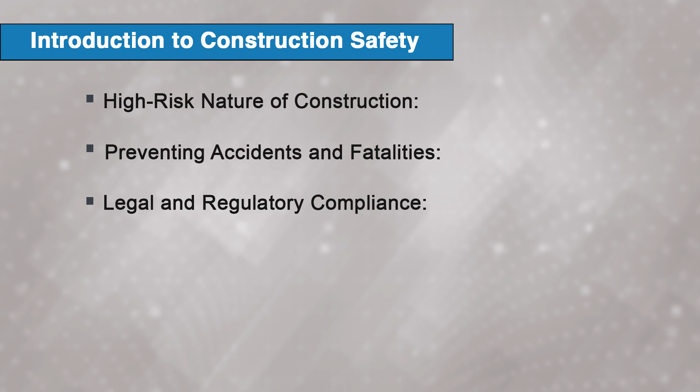The importance of safety is also required for legal and regulatory compliance. Adherence to safety regulations such as those established by the Occupational Safety and Health Administration (OSHA) is mandatory and helps avoid legal penalties, fines and potential shutdowns. Compliance demonstrates a company's commitment to worker welfare and can enhance its reputation within the industry.

Safety is also required for the economic benefits. Reducing workplace accidents leads to lower medical and insurance costs and minimizes downtime caused by incident investigations and repairs. A safe working environment improves efficiency and productivity, contributing to timely project completion and cost savings.

It is also required for the moral and ethical responsibility. Employers have an ethical obligation to provide a safe and healthy workplace, ensuring that employees return home safely each day. Prioritizing safety fosters a culture of care and respect, which can improve employees' morale and job satisfaction.

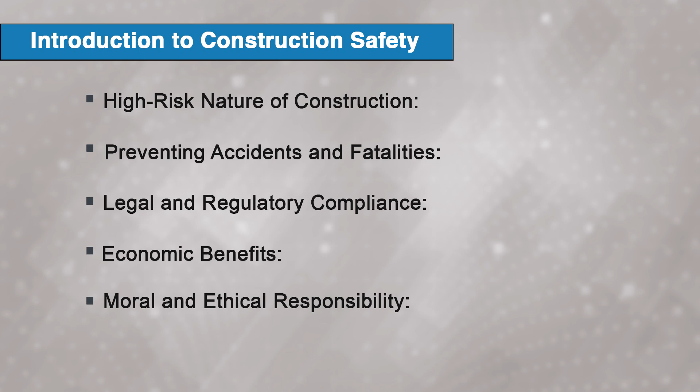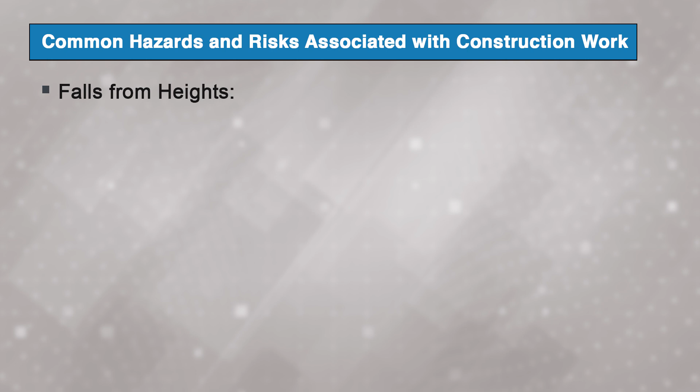Moving on, let us discuss some of the common hazards and risks associated with construction work. First one is falls from height. It is one of the leading causes of fatalities in construction, often occurring due to inadequate fall protection and unguarded edges or improper use of scaffolding and ladders. Mitigation includes strategies like using guardrails and safety harnesses, and ensuring proper training in working at heights.

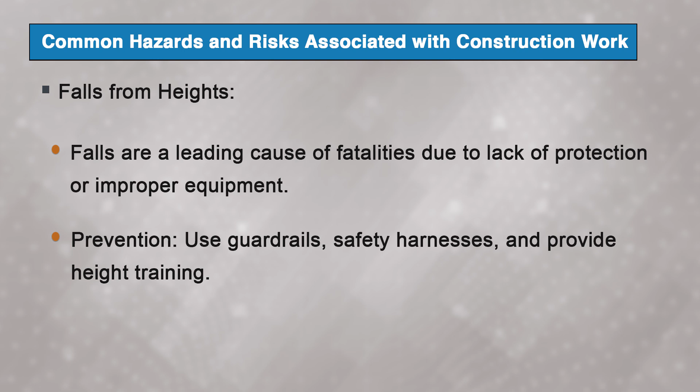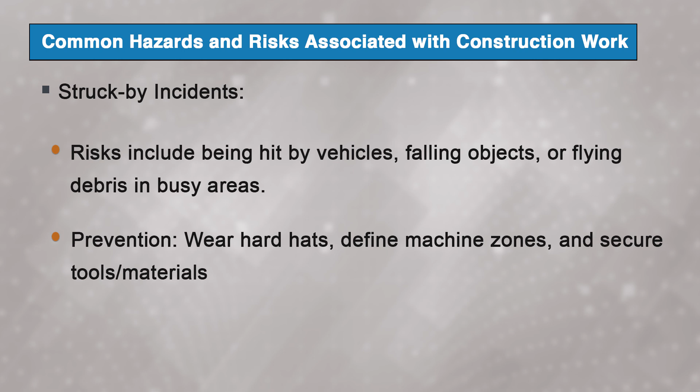Next one is struck-by incidents. Workers are at risk of being hit by moving vehicles, falling objects or flying debris, especially in busy or cluttered work areas. Safety measures involve enforcing the use of hard hats, establishing clear zones for machinery operation and securing tools and materials properly.

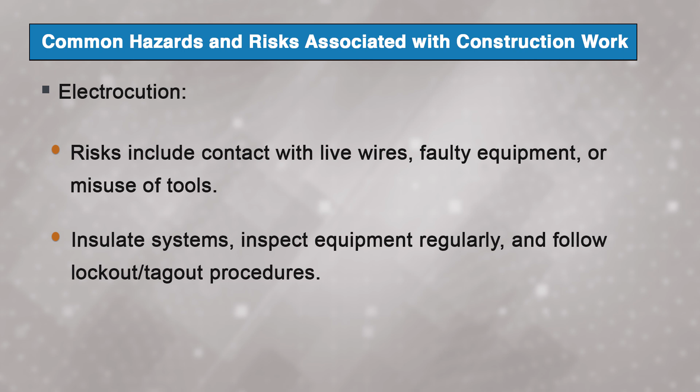Next one is electrocution. Risks arise from contact with live wires, faulty electrical equipment or improper use of electrical tools. Preventive actions can include proper insulation of electrical systems, regular equipment inspections and adherence to lockout/tagout procedures.

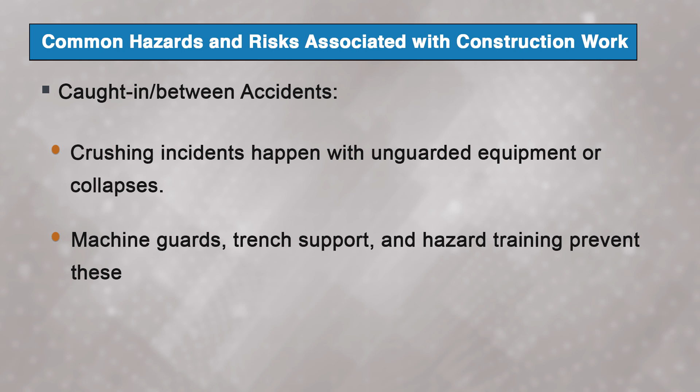Next one is caught-in or between accidents. These occur when workers are caught in or compressed by equipment or objects or when structures collapse. Safety protocols involve ensuring machinery is properly guarded, trenches are adequately supported and workers are trained to recognize and avoid such hazards.

Next hazard is exposure to hazardous material. Construction work can involve handling chemicals, asbestos, silica dust, and other harmful substances leading to respiratory issues and other health problems. Protective measures include using appropriate PPE, that is personal protective equipment, ensuring proper ventilation and providing training on handling and disposing of hazardous materials safely.

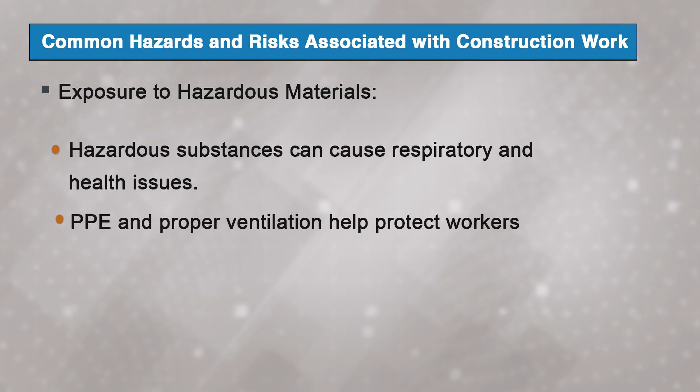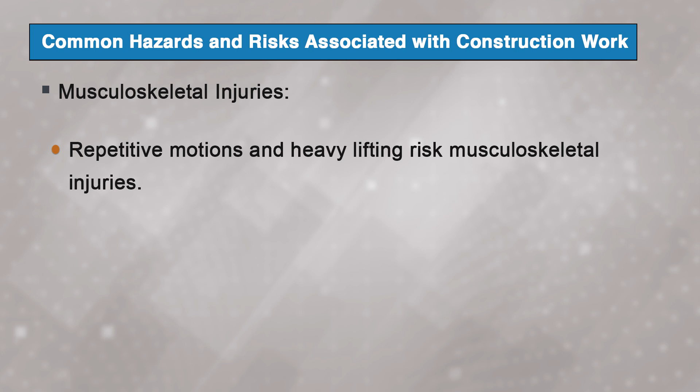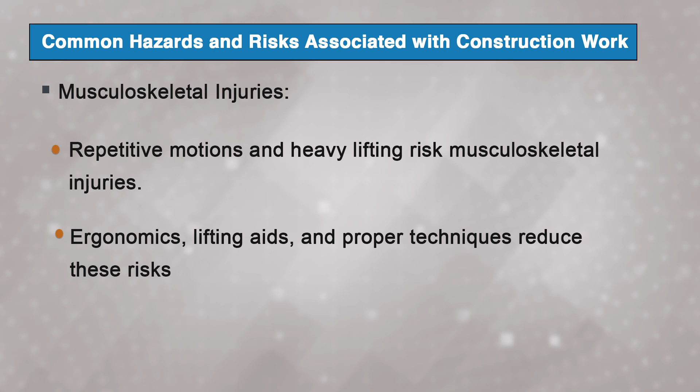Next one is musculoskeletal injuries. Repetitive motions, heavy lifting and awkward posture can cause strains, sprains and long-term musculoskeletal disorders. Implementing ergonomic practices, using mechanical lifting aids and training workers on proper lifting techniques can reduce these risks.

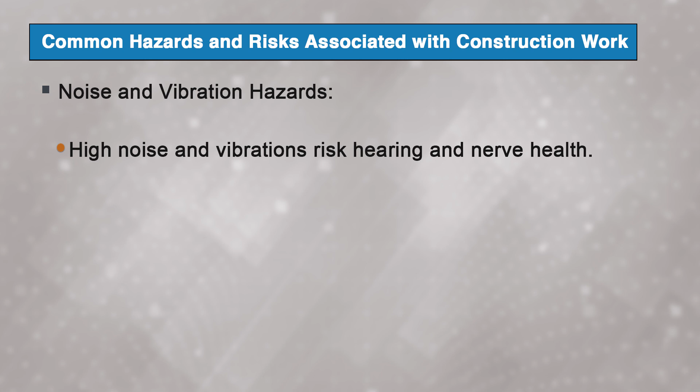Next hazard is noise and vibration. Prolonged exposure to high noise levels can cause hearing loss, while excessive vibration can lead to circulatory and nerve disorders. Use of ear protection, regular equipment maintenance and monitoring exposure levels are essential to minimize these hazards.

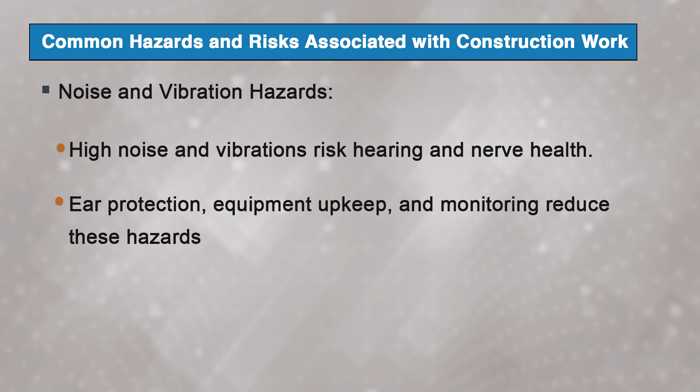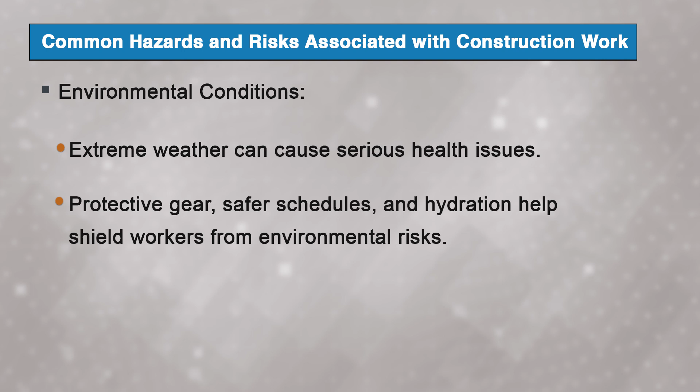Next is environmental conditions. Extreme temperatures, inclement weather and exposure to sun can result in heat stroke, hypothermia and other weather-related health issues. Providing appropriate clothing, scheduling work during safer times of the day and ensuring access to hydration and shelter help protect workers from environmental hazards.

Moving on, we will be discussing the role of safety in protecting workers and maintaining productivity. A strong safety culture ensures that workers feel valued and protected, leading to increased job satisfaction and loyalty. Healthy and safe workers are more likely to perform efficiently and effectively, contributing positively to project outcomes. It will reduce downtime and delays.

Accidents can halt construction activities, leading to project delays and increased cost due to the medical expenses and equipment repairs. Effective safety practices minimize interruption by preventing incidents that cause work stoppages.

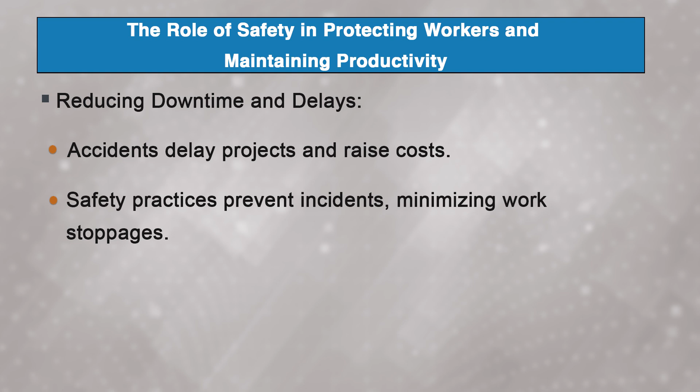Next is improving quality of work. Safety protocols often go hand in hand with quality control measures, ensuring that work is performed correctly and safely. Workers who are not worried about their safety can focus better on their task, resulting in higher quality workmanship.

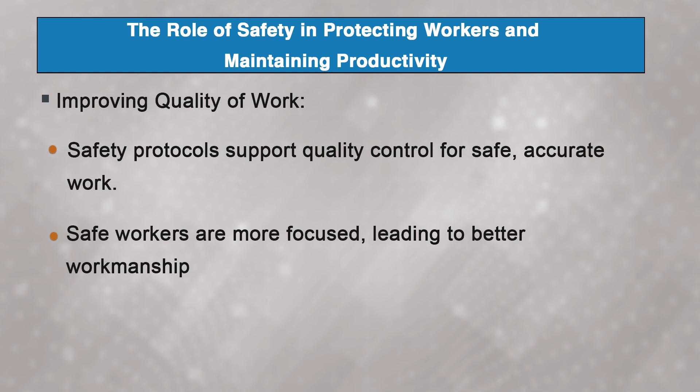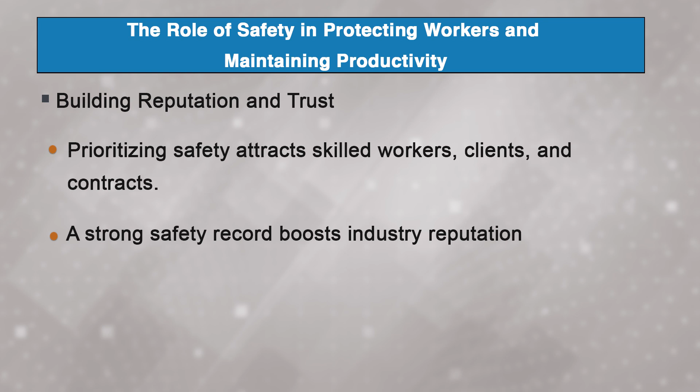Building reputation and trust. Companies known for prioritizing safety are more likely to attract skilled workers, win contracts and earn the trust of clients and stakeholders. A good safety record demonstrates professionalism and responsibility, enhancing a company's standing in the industry.

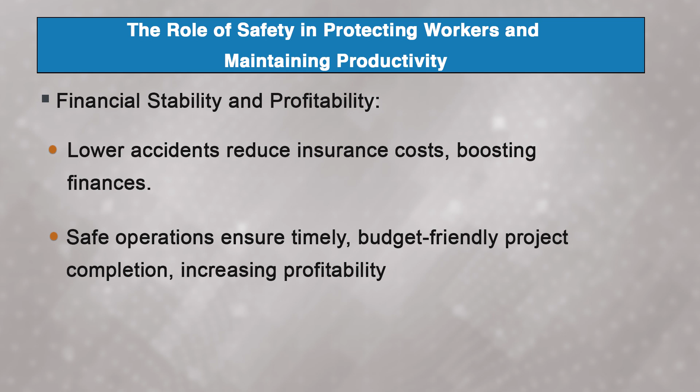Next one is financial stability and profitability. Lower accident rates reduce insurance premiums and workers' compensation claims, contributing to better financial performance. Efficient and safe operations can lead to successful project completion within budget and time frame, improving profitability and competitiveness.

Moving on, we will be discussing personal protective equipment, that is PPE, in construction. So, what is PPE? It basically refers to specialized clothing or equipment worn by workers to protect against health and safety hazards. It includes items like helmets, gloves, eye protection, high visibility clothing, safety footwear and harness, etc.

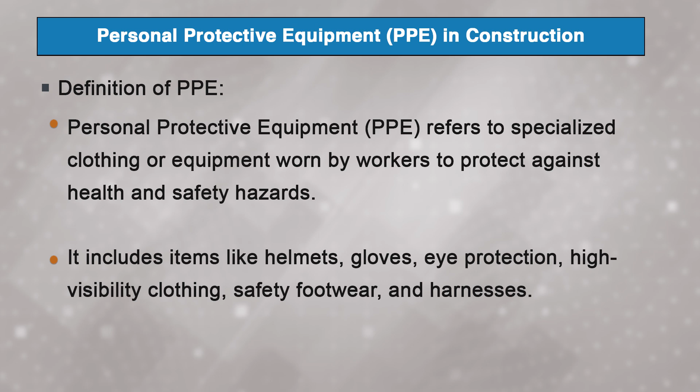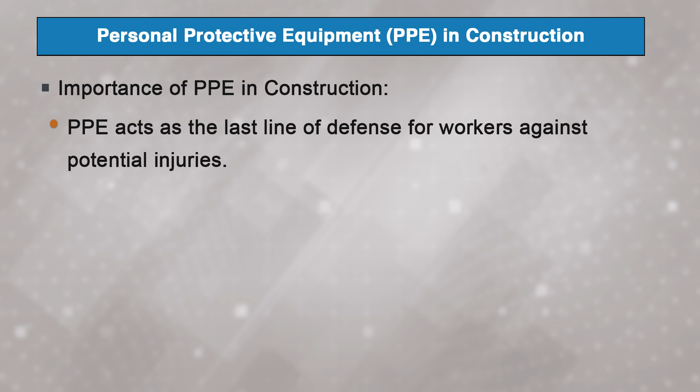So, one question comes to mind: what is the importance of PPE in construction? PPE acts as a last line of defense for the workers against potential injuries from various hazards present on construction sites. It significantly reduces the risk of injuries and fatalities by providing physical protection against specific dangers like falling objects, sharp materials and hazardous substances.

PPE is essential not just for worker safety, but also for regulatory compliance, as failure to use appropriate PPE can lead to legal consequences and fines. Moving on, we will discuss some of the types of PPE and their specific uses.

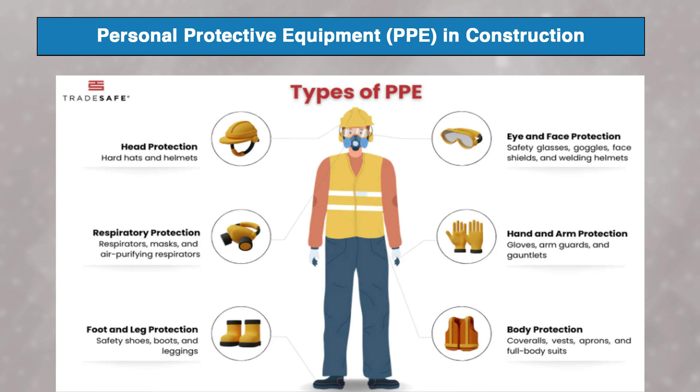First one is head protection. Hard hats protect the head from falling objects, debris and electrical hazards. There are different classes of hard hats. For example, class G for general use, class E for electrical work, class C for comfort and impact protection.

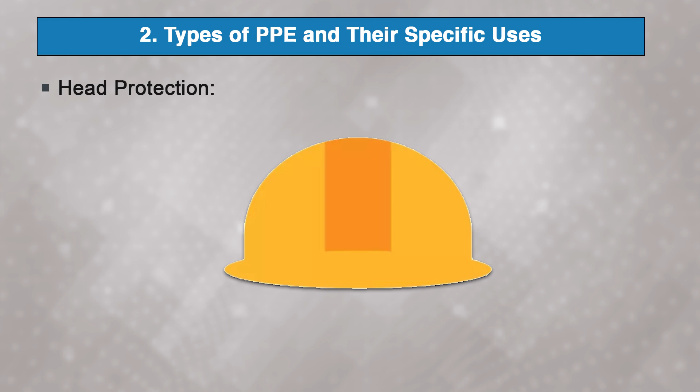Next one is eye and face protection, in which we include safety glasses, which shield the eyes from dust, flying particles and chemical splashes. Next in this category is goggles, which provide a secure fit around the eyes, offering more comprehensive protection against hazards like chemicals, dust and welding sparks.

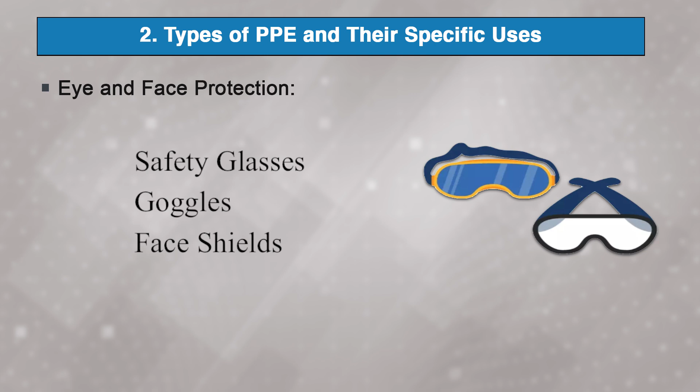Next one is face shield. It is used for tasks like grinding, cutting or handling hazardous chemicals where full face protection is necessary. Next PPE is hearing protection, which includes earplugs. They are inserted into the ear canal to protect against high noise levels, particularly in areas with heavy machinery.

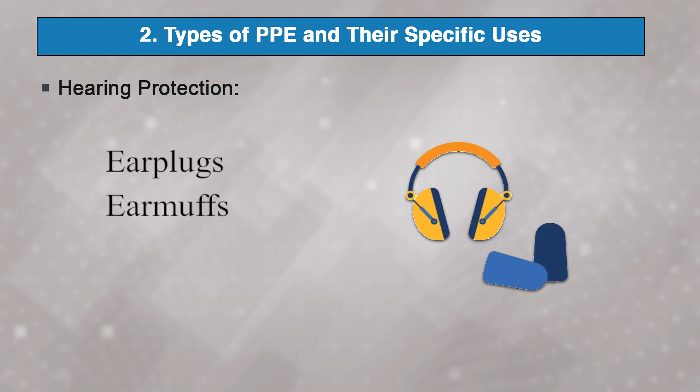Next in this category is earmuffs, which cover the entire ear, offering a higher level of protection against loud noises and can be used in conjunction with other PPE. Next PPE is for respiratory protection, which includes the dust mask. It is used for environments with non-toxic dust, such as during sanding or sweeping.

In this category, respirators are also used, which provide protection against harmful dust, fumes and gases. Types include half face or full face respirators depending on the level of protection needed. Powered air purifying respirators are also used. These are used in environments with high levels of contaminants, providing filtered air to the user.

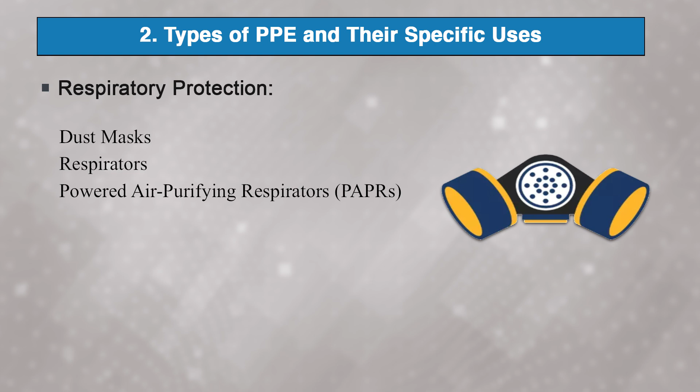Next PPE is for hand protection. In this category, gloves protect hands from cuts, abrasions, chemical exposure and electrical hazards. Different gloves are designed for specific tasks, such as cut resistant gloves for handling sharp materials, chemical resistant gloves for working with hazardous substances and insulated gloves for electrical work.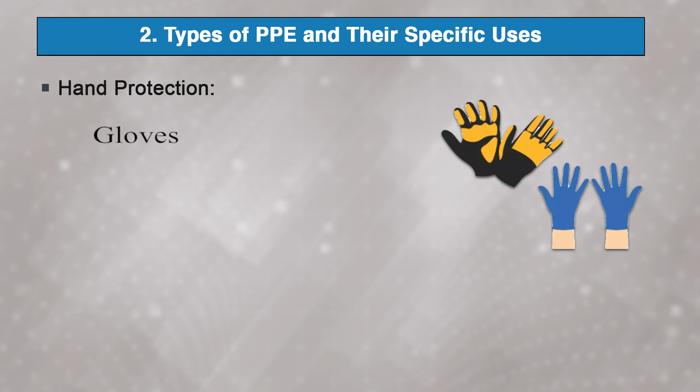Next PPE is for foot protection, which includes safety boots, which provide protection against foot injuries caused by heavy objects, sharp debris and slippery surfaces. Steel or composite toe caps, puncture resistant soles and slip resistant treads are common features of safety boots.

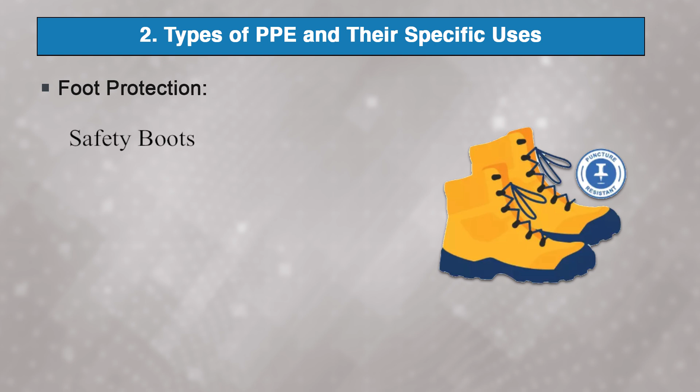Next PPE is for body protection, which includes high visibility clothing. It is essential for workers operating near moving vehicles or machinery, especially in low light conditions. Next in this category is coveralls, which protect the body from exposure to harmful substances, dirt and abrasions.

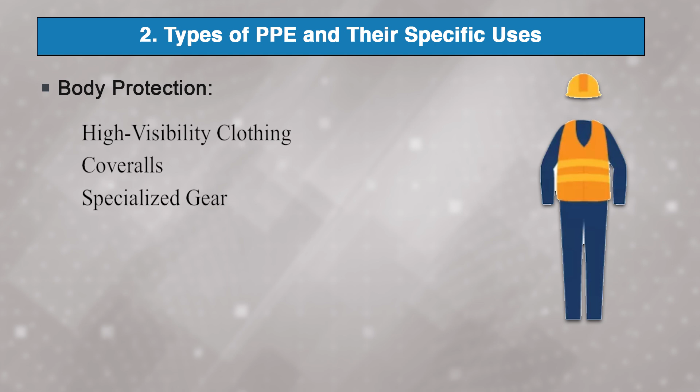Also in this category is specialized gear, basically flame resistant clothing for workers exposed to fire hazards and chemical resistant suits for those handling hazardous materials. Next PPE is for fall protection, which includes the safety harness. It is used when working at heights to prevent falls. They must be properly fitted and connected to a secure anchor point.

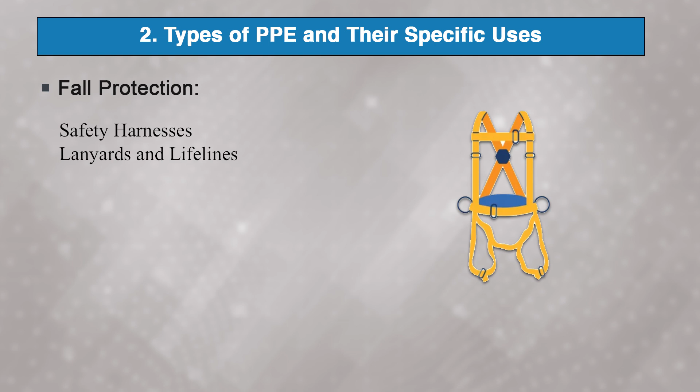Lanyards and lifelines provide additional fall protection, absorbing shock and preventing falls from leading to serious injuries.

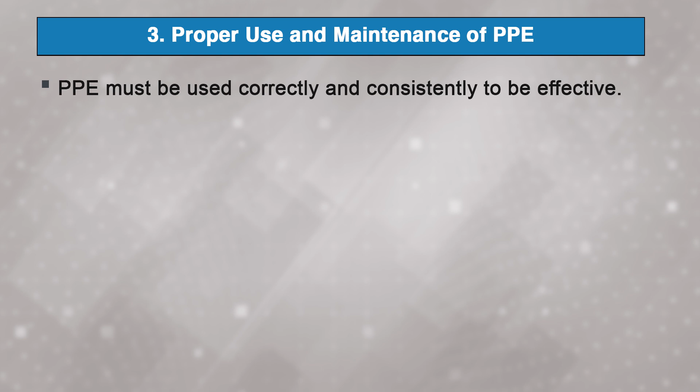Now, how to use or properly use and maintain PPE. Correct usage means PPE must be used correctly and consistently to be effective. Workers should be trained on how to properly wear and use each type of PPE. Misuse or improper fit can reduce the effectiveness of PPE, leading to increased risk of injury.

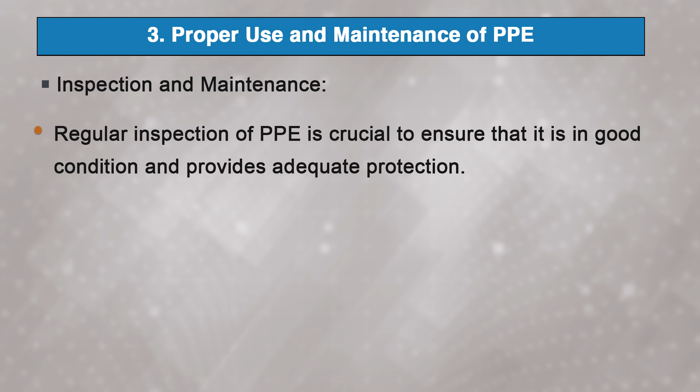Next is inspection and maintenance of PPE. Regular inspection of PPE is crucial to ensure it is in good condition and provides adequate protection. Damaged or worn out PPE should be replaced immediately to maintain safety standards. Workers should be trained to identify signs of wear and tear, such as cracks in hard hats, scratches on safety glasses, or fraying in harnesses.

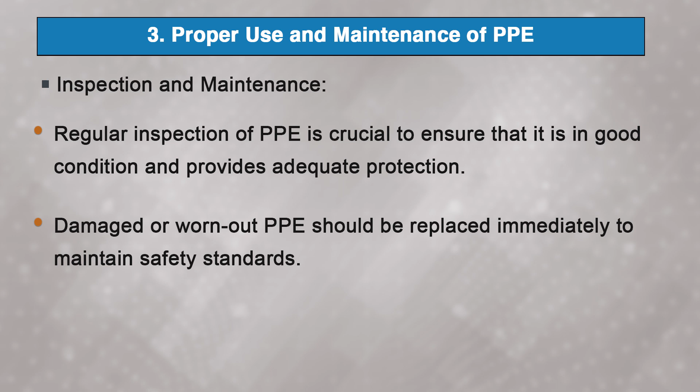Next is hygiene and storage. PPE should be kept clean and stored in a dry, safe place when not in use to prolong its life and effectiveness. Respiratory protection devices in particular require regular cleaning and proper storage to prevent contamination and ensure their protective qualities.

Next topic is regulatory requirements for PPE. There are legal standards and guidelines, including OSHA and other regulatory bodies, which have established specific standards for the use of PPE in construction. Employers are legally required to provide PPE to workers at no cost and ensure it meets safety standards.

There are employer responsibilities too, including that employers must assess the workplace for hazards and determine the necessary PPE for each task. They are also responsible for providing training on proper use, care, and maintenance of PPE.

There are worker responsibilities also, including that workers are required to use the PPE provided and follow the training they receive on its correct use. They must report any issue with PPE to their supervisor and refrain from using damaged or ineffective equipment.

Moving on, we will discuss our next topic: hazard identification and risk assessment. Hazard identification involves recognizing and assessing potential sources of harm or danger in the workplace. It is the first step in the process of risk management, encompassing all activities, conditions, or materials that have the potential to cause injury, illness, or damage.

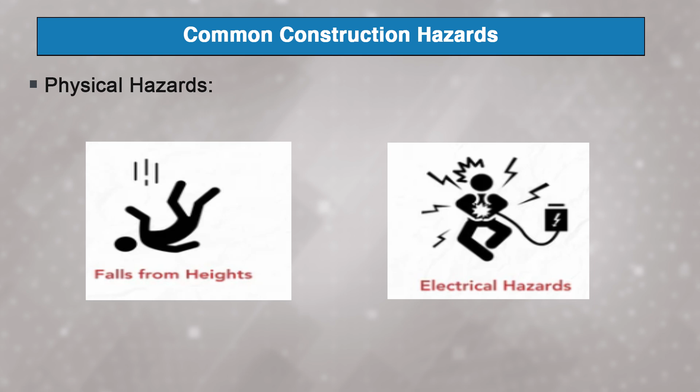Next in physical hazards is struck-by hazards: workers being hit by moving vehicles, falling objects, or flying debris. This is common in areas with heavy machinery or overhead work. Next is caught-in or caught-between hazards, as we have already discussed: workers being caught in or compressed by equipment, collapsing trenches, or materials. This includes risk from machinery, unsecured trenches, and collapsing structures.

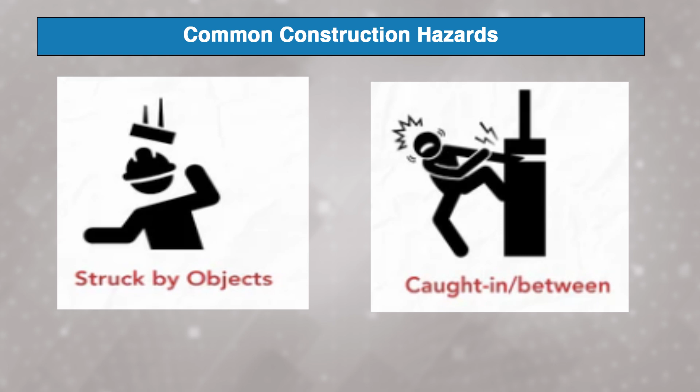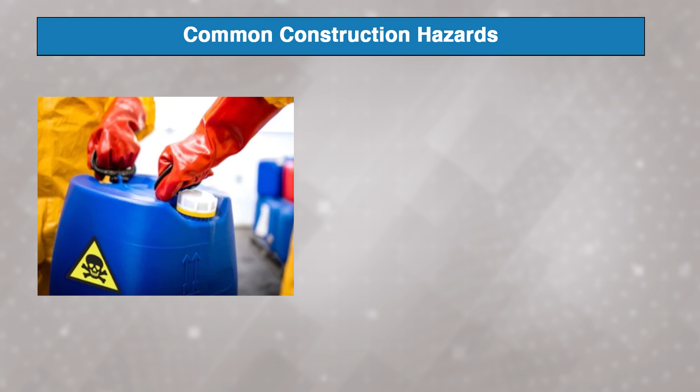Next type of hazard is chemical hazard: exposure to hazardous substances, for example inhalation or contact with chemicals like asbestos, silica, lead, or toxic fumes, can cause respiratory issues, skin irritation, and long-term health problems. Fires and explosions from flammable materials, gases, and improper handling of chemicals can result in fires or explosions causing severe injuries or fatalities.

Next hazard is ergonomic hazard, which includes manual handling: improper lifting techniques, repetitive motion, and awkward posture can lead to musculoskeletal injuries. Next in this is vibration and noise: prolonged exposure to high levels of vibration and noise can cause long-term damage to nerves, muscles, and hearing.

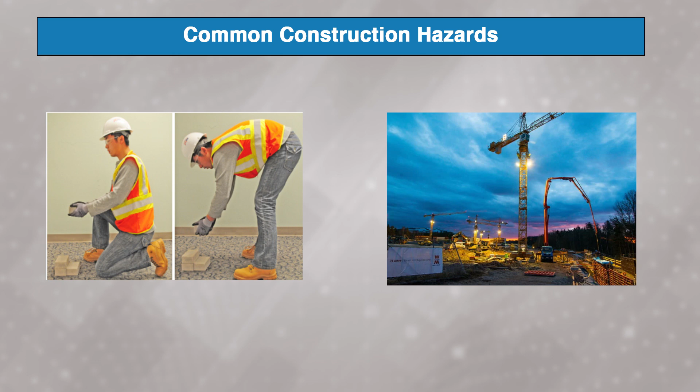Next hazard is environmental hazard, in which first is extreme weather conditions: working in harsh weather such as extreme heat, cold, or storms can lead to heat stroke, hypothermia, or accidents due to slippery surfaces. Poor or insufficient lighting increases the risk of accidents, especially in areas where precision work is required or hazards are not easily visible.

Now, what are the techniques for hazard identification? First is site inspection: regular and systematic inspection of the work site to identify potential hazards. Inspections should be carried out by trained personnel who can recognize both existing and potential dangers. Tools like checklists can ensure that no potential hazard is overlooked during inspection.

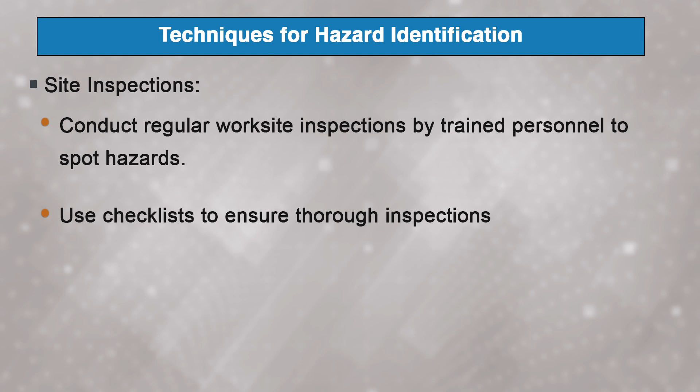Next technique is job safety analysis, a process of breaking down a job into individual steps, identifying the hazards associated with each step and determining the necessary controls to mitigate those hazards. Job safety analysis helps workers understand the specific risks of the task and how to avoid them.

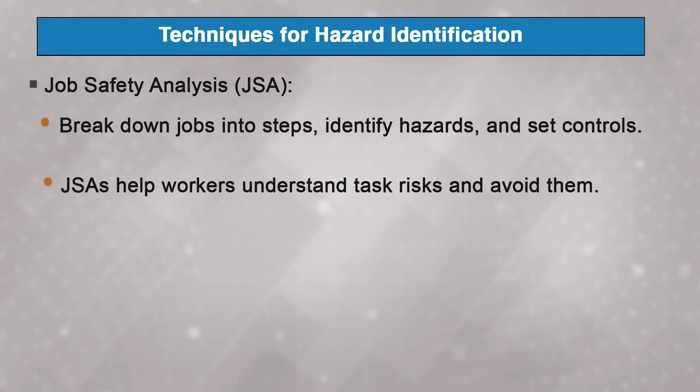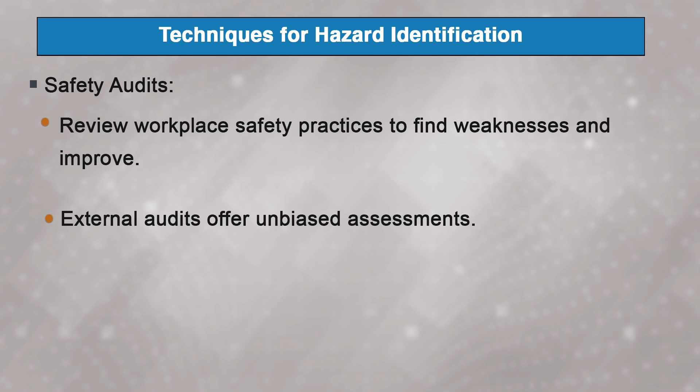Next we can do are the safety audits, a comprehensive review of the workplace safety practices, policies and procedures. Audits help identify weaknesses in the safety protocols and provide recommendations for improvement. External audits by independent bodies can provide an unbiased assessment of safety practices.

We can also take workers' feedback, which includes encouraging the workers to report hazards they observe. Workers are often the first to notice potential dangers, and their input is valuable in identifying hazards that might be missed during formal inspection. Anonymous reporting systems can help ensure that workers feel comfortable reporting hazards without fear of retaliation.

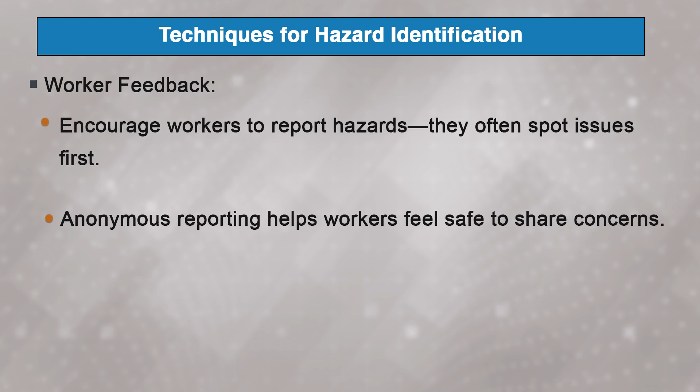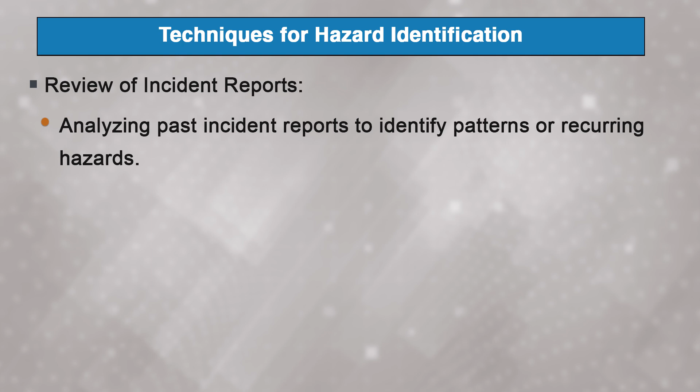Next technique is review of incident reports, analyzing past incident reports to identify patterns or recurring hazards. Understanding the causes of previous accidents can help prevent similar incidents in the future. Near miss reports are also valuable as they indicate hazards that could have led to an accident if not addressed.

Next one is the risk assessment process, which includes firstly identifying hazards, systematically identifying all potential hazards in the workplace through inspection, observation and employee feedback, consideration of both routine and non-routine activities as well as potential emergencies.

Next is assessing risk, evaluating the likelihood of each identified hazard causing harm and the severity of the potential consequences, using tools like risk matrices to categorize risk as low, medium or high based on their probability and impact.

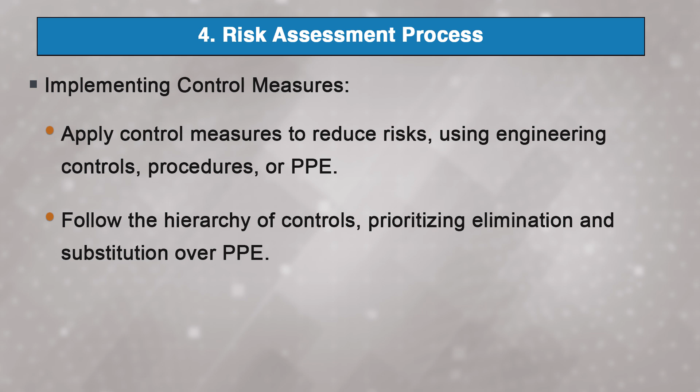Next, implementing control measures, determining appropriate control measures to eliminate or mitigate risk. Controls can be engineering controls, for example barriers, ventilation, administrative controls, for example training procedures, or personal protective equipment, that is PPE. The hierarchy of control should be followed, prioritizing elimination and substitution of hazards over reliance on PPE.

Next one is monitoring and reviewing. Regularly monitoring the effectiveness of implemented controls to ensure they are working as intended. Reviewing risk assessments periodically and after any changes in work processes, new equipment or incidents to ensure ongoing safety.

So, our next topic is about safety measures for working at height. Working at height is one of the most dangerous activities in construction, with falls being a leading cause of fatalities. This focuses on essential safety measures to prevent falls and ensure worker safety.

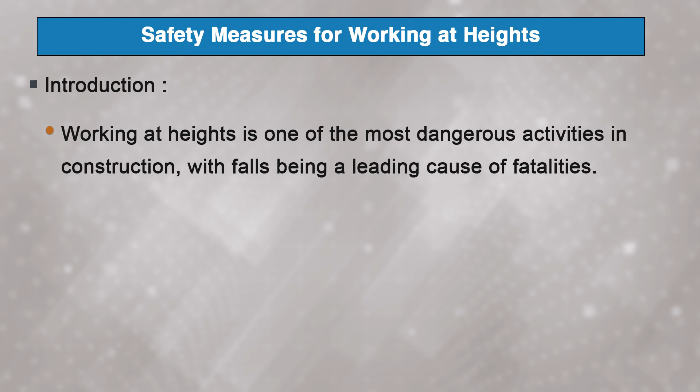First method of fall protection will be the guardrails. Guardrails are physical barriers installed around open edges such as roofs, scaffolds and elevated work platforms to prevent workers from falling. They are the preferred method of fall protection as they provide a passive form of safety that does not require workers to take specific actions to be protected.

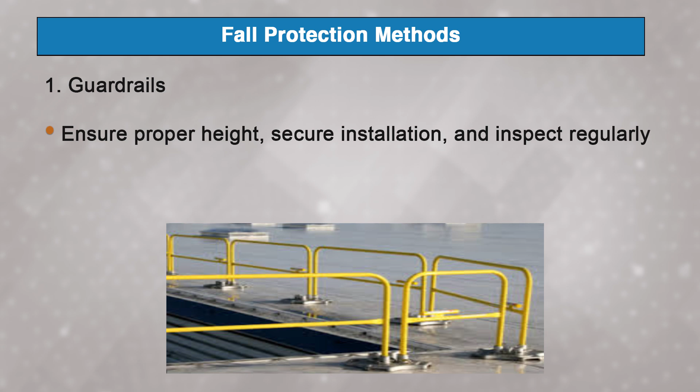Now, we will discuss design and installation of guardrails. Guardrails must be constructed to withstand the force of a person falling against them. Typically, they consist of a top rail, mid rail and a toe board. Proper installation is critical. The top rail should be at a height that prevents workers from accidentally stepping over or leaning beyond the edge. Regular inspections are necessary to ensure guardrails remain secure and undamaged.

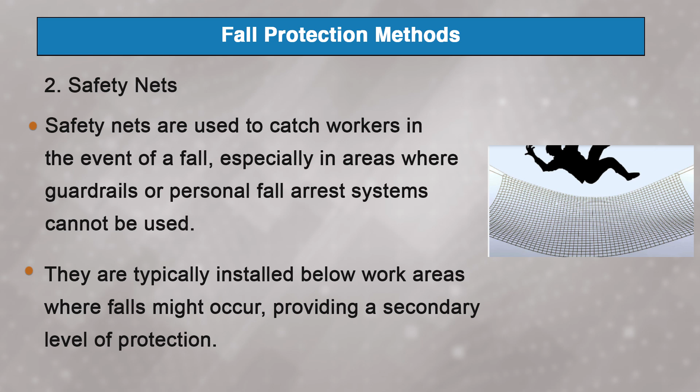Next one are the safety nets. Safety nets are used to catch workers in the event of a fall, especially in areas where guardrails or personal fall arrest systems cannot be used. They are typically installed below work areas where falls might occur, providing a secondary level of protection. Safety nets should be positioned close enough to the work surface to limit the distance of a fall. They must be securely anchored and regularly inspected for damage or sagging to ensure they function correctly.

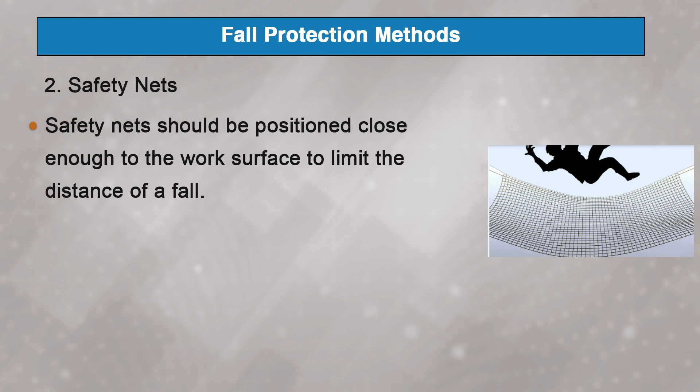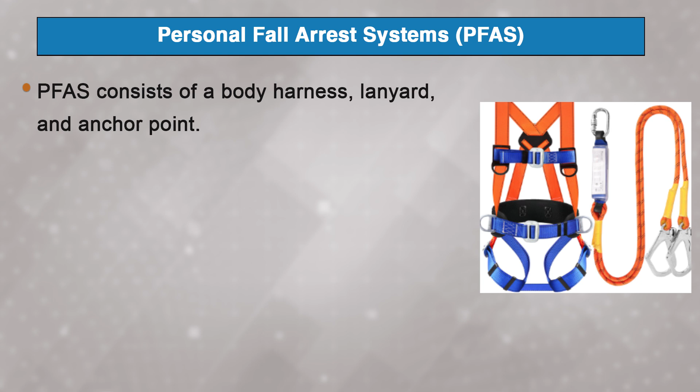Next one is the Personal Fall Arrest System, PFAS. PFAS consists of a body harness, lanyard and anchor point. This system is designed to safely stop a fall and minimize injury by distributing the force of the fall across the body. The body harness must fit the worker properly and be worn at all times when there is a risk of falling. The lanyard connects the harness to an anchor point, often equipped with a shock absorber to reduce the impact of a fall. The anchor point must be capable of supporting the force of a fall, typically rated to hold at least 5,000 pounds per worker attached.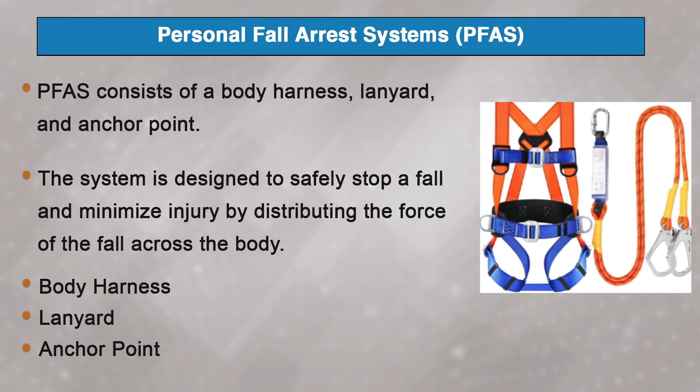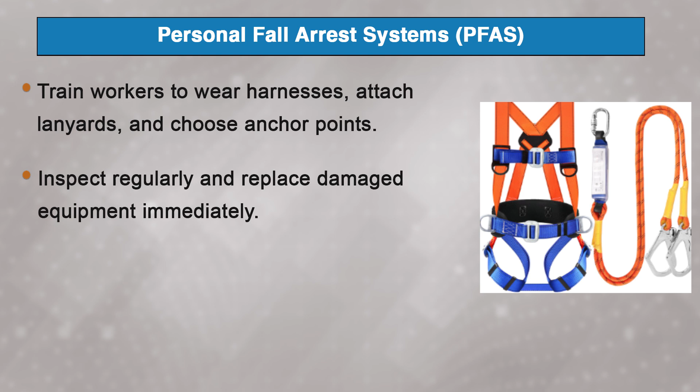Next is proper use and maintenance. Workers must be trained on how to correctly wear the harness, attach the lanyard and choose an appropriate anchor point. Regular inspections are crucial to identify wear and tear or damage to the equipment. Any compromised component must be replaced immediately.

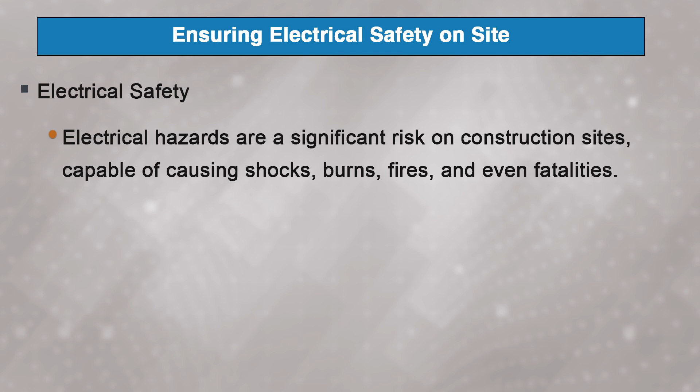Next topic will be dealing with electrical safety on site. Electrical hazards are a significant risk on construction sites, capable of causing shocks, burns, fires and even fatalities. Electrical safety procedures: first one is the lockout or tagout, that is LOTO procedure.

LOTO procedures are used to ensure that machinery and electrical systems are completely de-energized before any maintenance or repair work begins. The procedure involves locking the power source in an off position and tagging it to indicate that it should not be operated until the lock and tag are removed by the person who applied them.

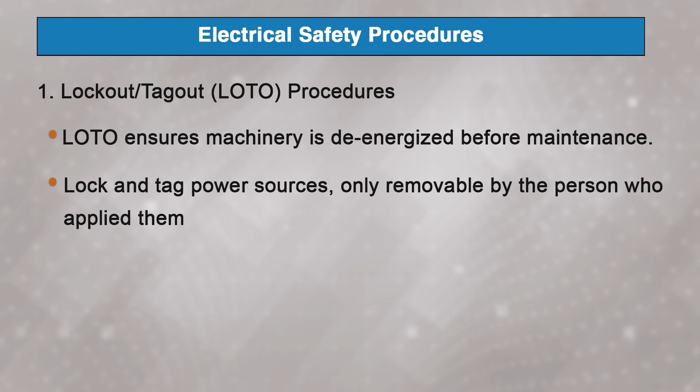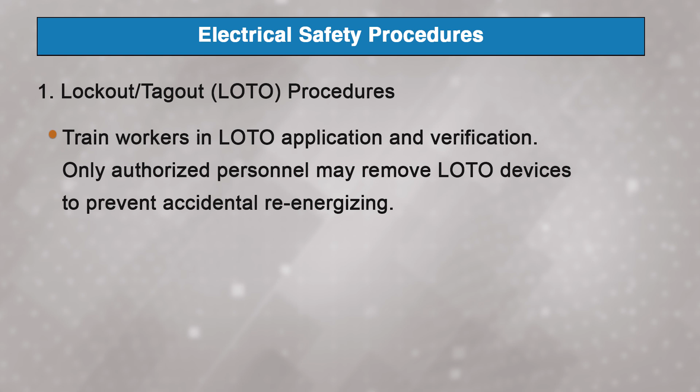Workers must be trained in the correct application of LOTO procedures, including how to lock and tag power sources and how to verify that the equipment is de-energized. Only authorized personnel should be allowed to remove LOTO devices, ensuring that no one inadvertently re-energizes the equipment while work is still in progress. Next method is proper insulation.

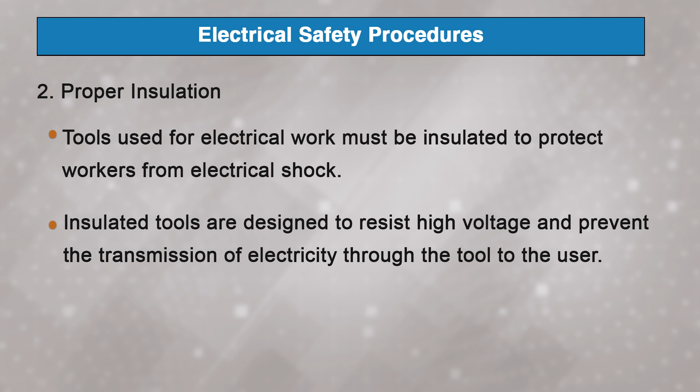Tools used for electrical work must be insulated to protect workers from electrical shock. Insulated tools are designed to resist high voltage and prevent the transmission of electricity through the tool to the users. Insulated gloves, mats and barriers should also be used when working with live electrical systems.

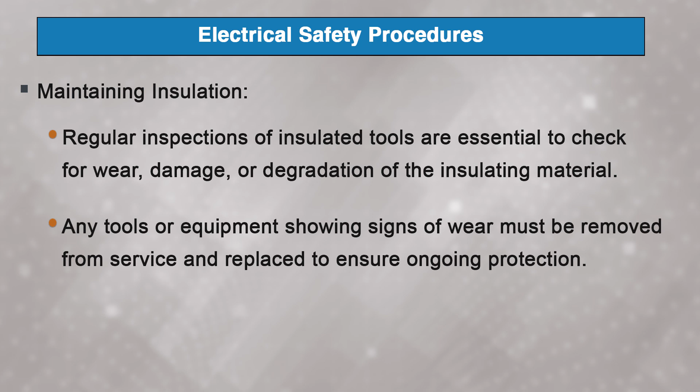Regular inspection of insulated tools is essential to check for wear, damage or degradation of the insulating material. Any tools or equipment showing signs of wear must be removed from service and replaced to ensure ongoing protection. Insulated gloves, mats and barriers should be used when working with live electrical systems.

So, how can we maintain insulation? Regular inspection of insulated tools is essential to check for wear, damage or degradation of insulating material. Any tools or equipment showing signs of wear must be removed from service and replaced to ensure ongoing protection.

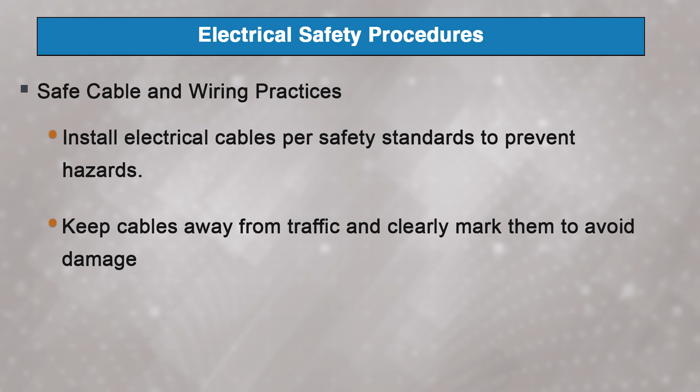Safe cable and wiring practices. This includes ensuring all electrical cables and wiring are installed following safety standards and codes to prevent hazards such as short circuits, overloads and fires. Cables should be kept away from high traffic areas to prevent damage from vehicles or foot traffic and should be clearly marked to avoid accidental cutting or interference.

Hazardous conditions and precautions: identify areas where cables might be exposed to moisture, heat or chemicals and take additional precautions such as using weatherproof or armored cables. Ensure that all electrical systems are regularly inspected and maintained to prevent deterioration that could lead to electrical faults.

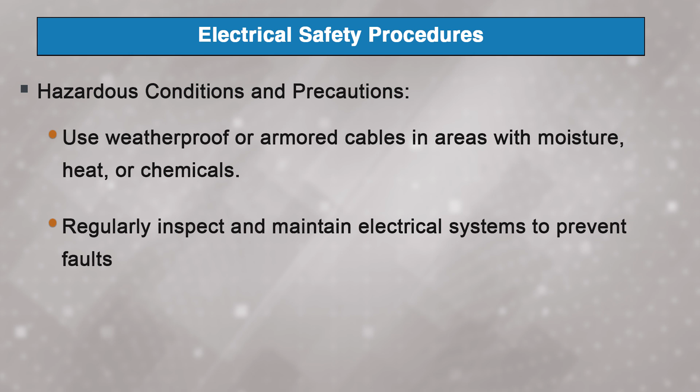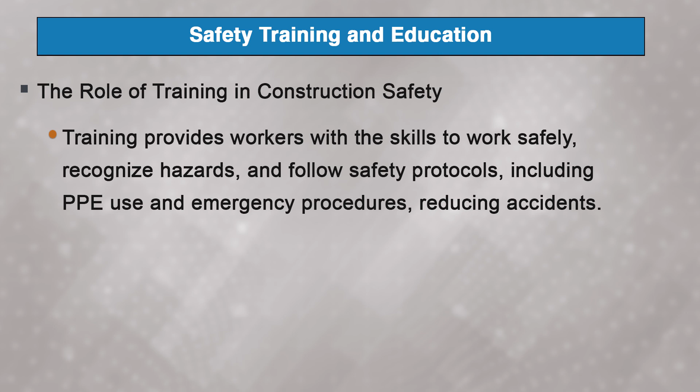So, in our last topic, we will be dealing with safety training and education. What is the role of training in the construction industry or construction safety? Training equips workers with the knowledge and skill necessary to perform their tasks safely and recognize potential hazards. Proper training ensures that workers understand safety protocols, the correct use of PPE, and emergency procedures, reducing the likelihood of accidents. There are some legal requirements also.

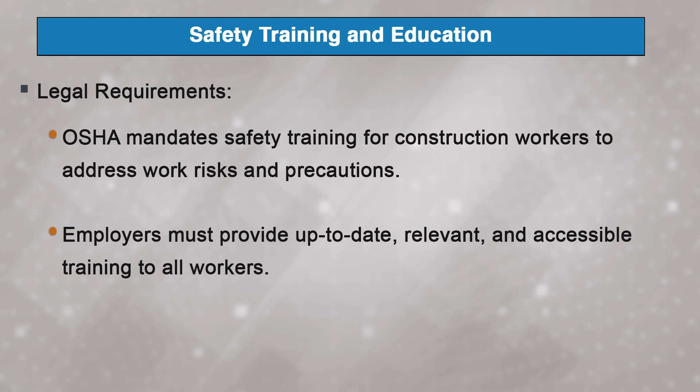Regulatory bodies like OSHA mandate specific safety trainings for construction workers, ensuring they are aware of risks associated with their work and the precautions they must take. Employers are legally obligated to provide this training and ensure it is relevant, up to date and accessible to all workers. So, we will discuss the types of safety training.

First one is general safety orientation, which introduces workers to the basic safety practices and policies on the construction site, including emergency procedures, hazard communication and general conduct. This is often provided to new hires before they begin work to ensure that they understand the company's safety culture and expectations.

Next training is task specific training, which focuses on particular hazards and safety measures associated with specific tasks such as working at heights, operating machinery, or handling hazardous materials. This ensures that workers are competent in safe execution of their job specific duties.

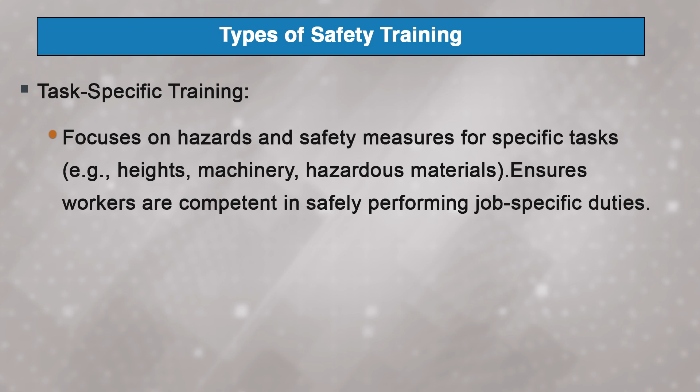Next training is emergency response training. It prepares workers to respond effectively to emergencies such as fires, chemical spills, or injuries. It includes training on evacuation procedures and use of fire extinguishers, first aid, and communication during emergencies.

Next is ongoing safety education. Regular refresher courses and safety meetings keep workers informed about new hazards, updated safety protocols, and lessons learned from past incidents. Continuous education reinforces the importance of safety and keeps workers vigilant against complacency.

What are the effective training techniques? First one is hands-on training. Practical demonstration and hands-on practices allow workers to apply safety procedures in a controlled environment. This method is particularly effective for tasks that involve complex equipment or high-risk activities, ensuring workers are comfortable and competent before performing the task on the job site.

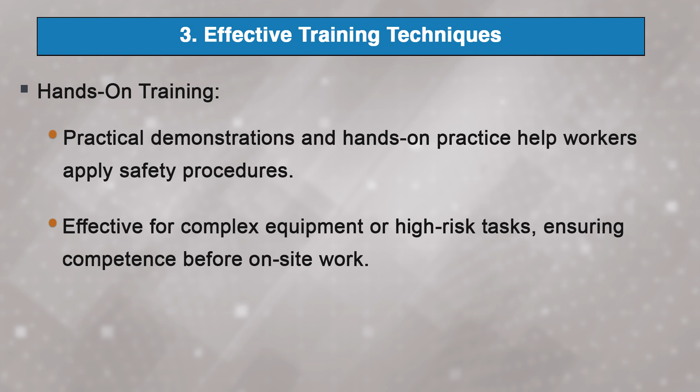We can also use simulations. Simulation and role-playing exercises provide a realistic, risk-free environment for workers to practice responding to emergencies or identifying hazards. Virtual reality, that is VR simulations, are becoming increasingly popular, offering immersive training experiences that can replicate a variety of dangerous scenarios.

So, dear learners, we have reached the end of today's session. I hope you found it informative and engaging. The next part of this session will be dealt with in the next session.